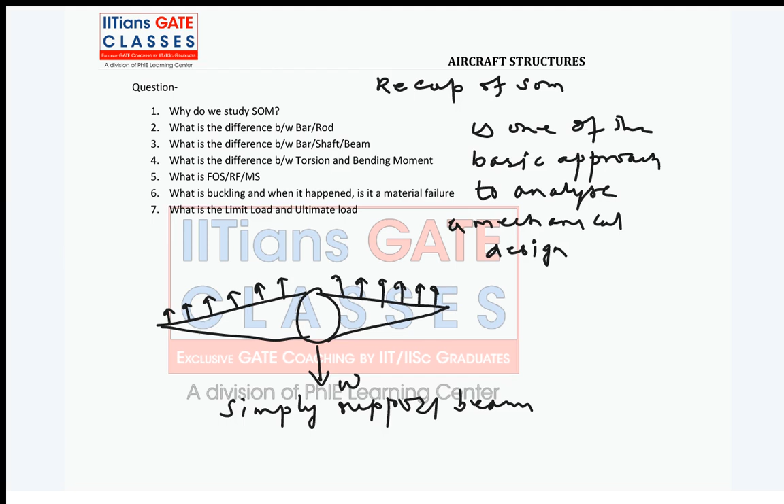If you take the whole aircraft from front view, is it an overhanging beam? It can be idealized as what? Simply supported beam. Clear? So if you take an aircraft with both wings, it can be idealized as a simply supported beam. Your lift is acting as what? Though the lift distribution is not uniform, people consider it as a uniform distribution, and it acts as a support. Okay, what is the load?

Weight. The entire weight of the aircraft acts on the fuselage, because the CG will lie on the symmetric line. Clear? So this idealization is clear. Why is it simply supported? What is the simply supported condition? This is a simply supported beam. Now you reverse it.

You know buoyancy. If you take water, in water there is a boat. So why is the boat floating? Due to buoyancy force, right? Same way, why is the aircraft in air? Force due to water is acting on it, buoyancy force. So buoyancy is a supporting force.

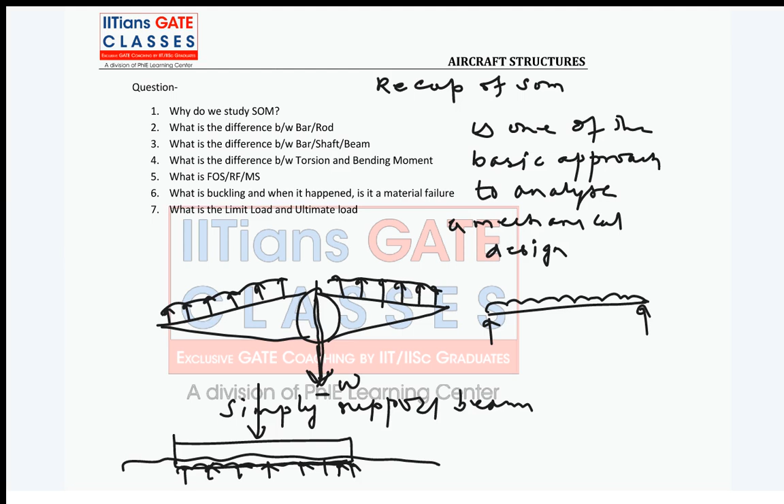If you take the single wing, then how will it be idealized? You can take lift acting upward, and usually the total weight of wing and engine and everything, people can take it as acting at the tip, right? So what is this? It's a cantilever beam.

So all these idealizations we are doing are based on what concepts? On the concepts of strength of material, right? Based on beam theory, and then you have torsion, you have axially loaded structures. So in brief, we can analyze any complicated mechanical system by idealizing it as a simple structure using strength of material basics. So strength of material is very important in any mechanical design to analyze that structure at the preliminary stage, where we use this idealization.

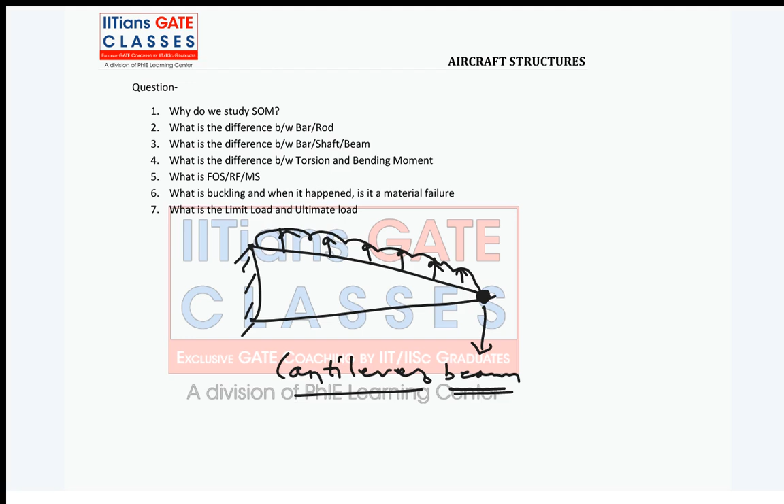Now, what is the parameter people always find? Can anyone tell? In the end, in the paper, what is written for any design? In design, you call it certification. What is finally written for any particular component or structure? Let's take static loads. What do people write? On what basis do people say the structure is safe? No, airworthiness is there, but on what basis do people say the structure is safe under this much load? Yeah, maximum load taken by design, FOS, etc.

Exactly. So, guys, this part is always very important: factor of safety, reserve factor, and MS, margin of safety. So what is the factor of safety? This is a frequently asked question in interviews for structure-related jobs. People are not aware, even if they have read everything. It's not necessarily ultimate load by maximum load. Factor of safety is always allowable by applied.

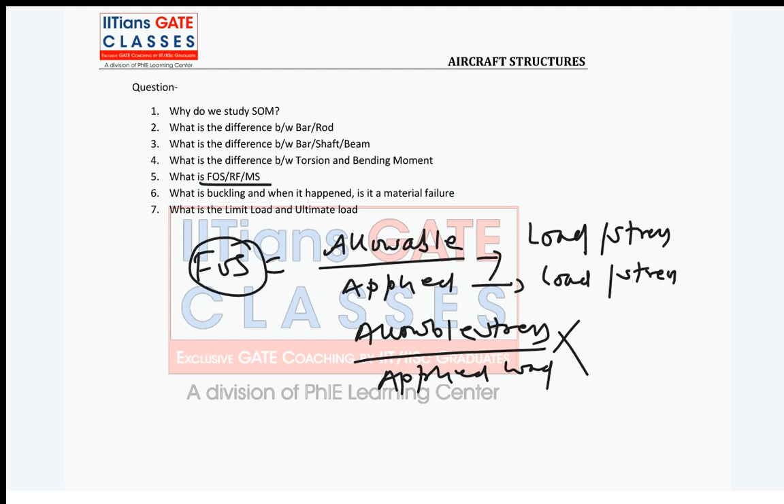In some organizations, this same factor of safety is also known as reserve factor, RF. Now, factor of safety, tell me guys, is it less than 1 or greater than 1? Yeah, it's dimensionless. It should always be greater than 1. For any safe design, the factor of safety must be greater than 1. Same, your RF must be greater than 1.

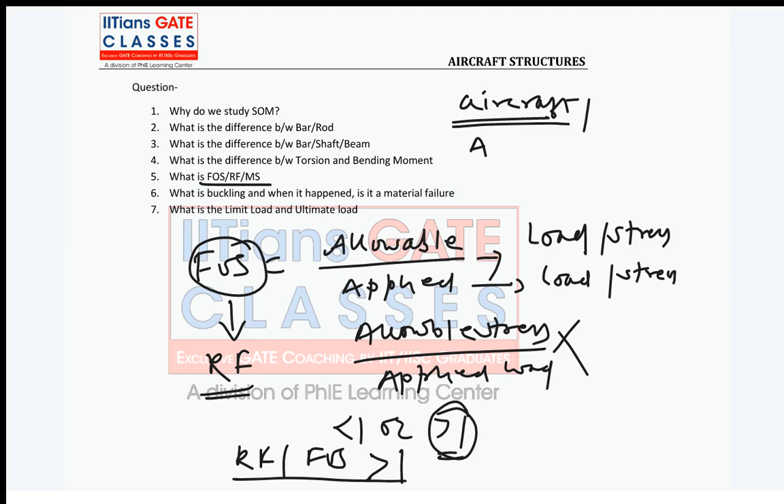Now guys, I'm asking one thing. What is the range of factor of safety for aircraft structures or aerospace structures? What is the factor of safety? Okay, 1.5. Is it 1.5? It's close to 1.2. Factor of safety is close to 1.2. It should not be more.

Why should it not be more? Why is it so close to 1 in the aircraft industry, in aircraft or aerospace structures? Why is the factor of safety so low? Yeah, money is the problem? People have so much money. Do you think money is a problem?

Weight is a problem. You cannot easily fly with high weight. It's not about composites, Pragati. Earlier, all aircraft were aluminum alloy, even metal. You cannot allow more factor of safety in aircraft. It's not just manufacturing cost. It's tough to fly efficiently if there is more weight.

Okay, so earlier the advancement happened slowly, right? So always in aircraft, in aerospace structures, weight is a constraint. You cannot have a high weight structure. So it needs to be a thin-walled structure, and again the factor of safety will be close to 1.

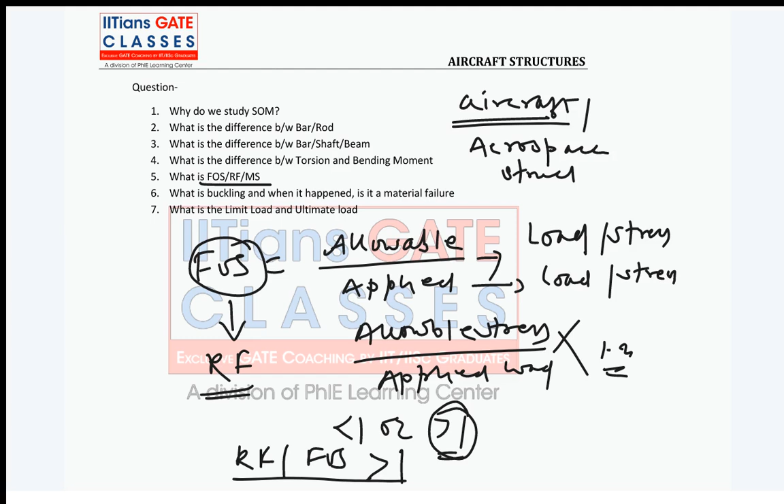So you guys understood what the factor of safety is, everybody? So always in certification we write the factor of safety or reserve factor. Now some companies use MS. What is MS? Can anyone tell? MS or MOS? It's the margin of safety. So the margin of safety formula is always FOS or RF minus 1.

So what does it mean? What should be the margin of safety for any safe design? MS should always be greater than what? 1? Is it 1? MOS should always be greater than 0. So that is the criterion. It should always be greater than 0. It can be 0.2, it can be 0.5, but it cannot be too high either.

If the margin of safety is high, then what do people do? Can anyone tell? If the margin of safety is high in the detailed design phase, what do people do, Sahil? They will try to put less thickness, right? They will try to optimize the structure for weight saving. So we always try to keep a positive margin, but a healthy margin,

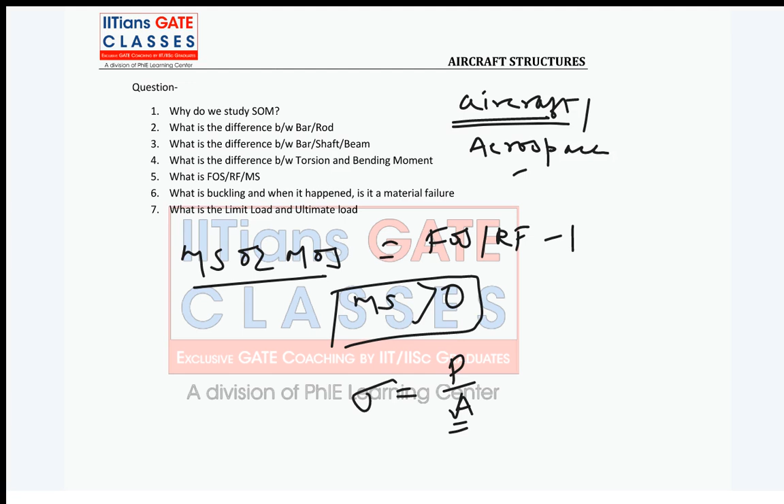Now guys, we were on factor of safety, right? So what is the factor of safety for mechanical designs? In aircraft design we have seen the factor of safety is close to 1.2. What is the factor of safety for mechanical designs? So guys, clear? It can go up to 10.

Nowadays in mechanical design also, in automotive, you guys have seen the Ambassador car and the Maruti car? Anybody from Kolkata? See the difference in design. Assis, you are well aware, right? Hindustan Motors. Now it's a junk company, no more. So you cannot have high weight structures. Now you can see everywhere people use the best materials and as little weight as possible, in any design.

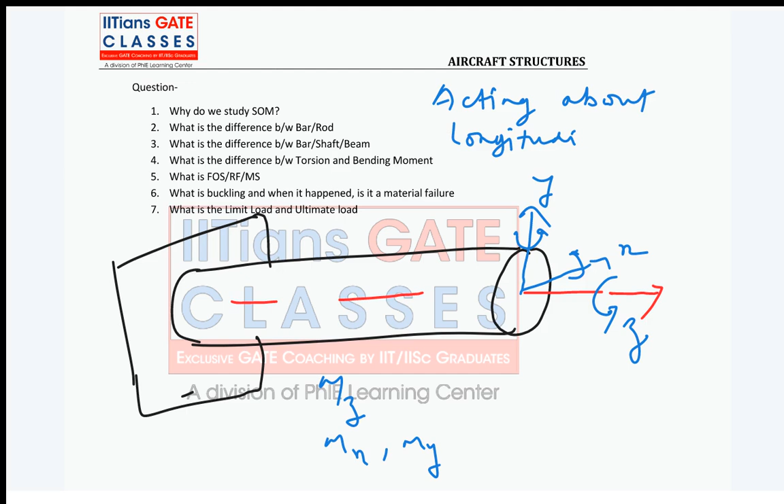So guys, now I am applying three different moments. One moment is about z, one is about x, and one is about y. Now tell me guys, what is this Mz, what is this Mx, and what is this My? So which is torsion? Everybody, which is torsion? Mz is torsion. The moment which is acting about what? Acting about the longitudinal axis. The moment which is acting about longitudinal axis, Mz, is torsion, or torque. Torsional load or torque.

So Mz is torsional load or torque. What about Mx and My? Mx and My are bending moments. So now guys, tell me, the bending moment always acts about which kind of axis? It acts about the cross sectional axis. Clear to everyone now, guys? That's the basic difference between bending moment and torque. Both are moments, or both are couples. I will tell the eccentricity of the load part also. Clear, guys?

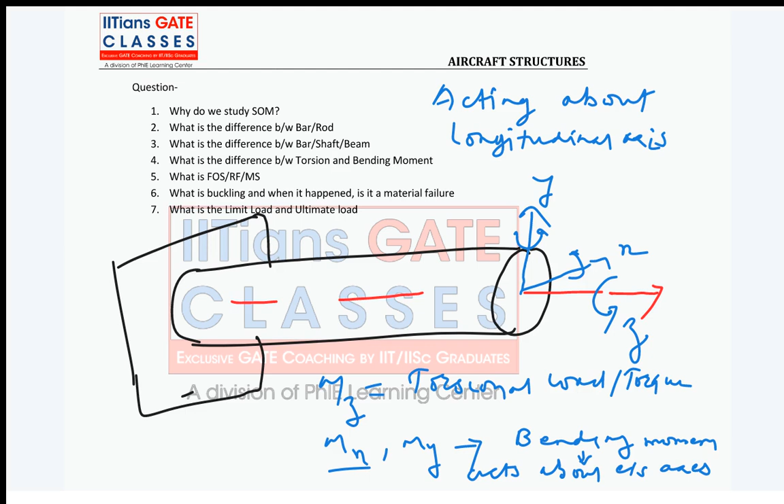Okay. Now, guys, to understand what I mean by eccentricity, let me draw again this part, and then we will go to question series. Now, guys, you look quickly here. If I draw this again,

so guys, are you finding class interesting? Yes or no? Quickly can tell.

Yes, can both occur at same time? Yes, Abhishek. Why not? Both can occur at the same time. I will tell you how. So Abhishek or the others, look here. This is the cross section, and this is the longitudinal axis. Now, guys, suppose there is an axial load which is acting not through this centroid, or you can say origin, O. It is acting at some distance from O, along X direction. What is going to happen? There is an eccentricity of the load. Due to this eccentricity, there will be a moment, and about which axis?

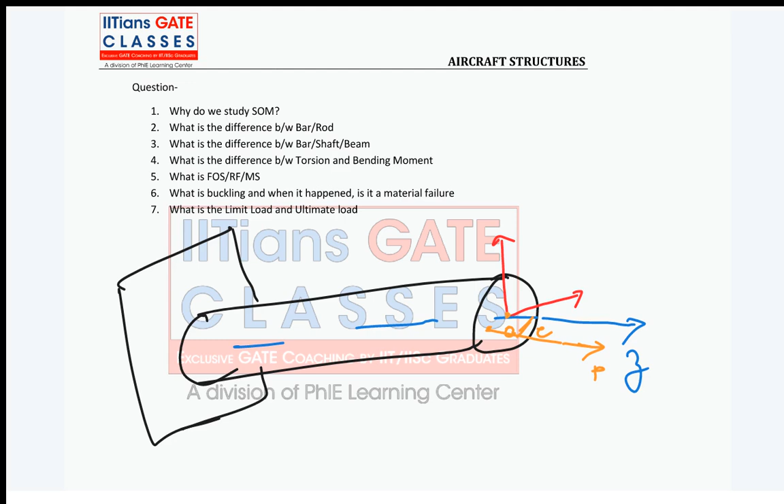If I draw this line, okay, no, wait, guys. This line is like this. Yeah, this is x-axis, and this load is applied at this x-axis. So what is it going to do? Exactly, there will be axial loading and there will be a bending moment. When you bring this load along Z, there will be P load acting along with a moment about Y axis. So what will be My? Your My will be P into this eccentricity. So clear, guys?

Now, Mr. Abhishek, suppose at this same point P, I have another load which is in vertical direction. What is going to happen? Tell me now, Abhishek. This is again eccentricity. This will twist, right? When we resolve this force to the origin, this P will come along with a twist about Z axis. The twist will be this way. Yes, so there is Mz, and that is also P into e. Clear? At the same time you can have both twisting and bending.

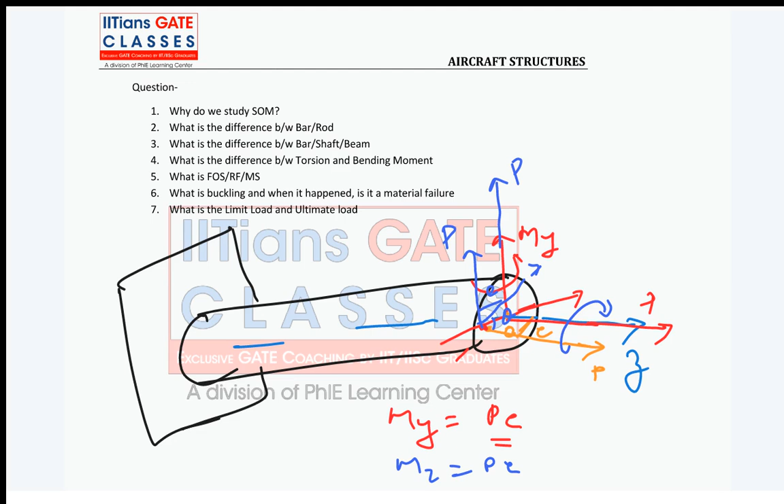Yeah. So guys, till now, is it clear? How to visualize torque, how to visualize bending moment, how these are created due to eccentricity of the loads. Okay, and those things can be at the same time. So that's all about bending moment and torque. Okay, now guys, next thing, tell me, what is buckling? I'm just revising these basics because you all have completed that.

Yeah, angle part. Yeah, Vignesh, sure. So, Vignesh, let's understand with 2D. This can be vertical load, this can be horizontal load, right? Now, suppose my load is acting like this, neither horizontal nor vertical. What is going to happen? There will be a horizontal component and a vertical component. Now these loads are at some eccentricity from O. Both loads will create their respective moments. Clear? This angle part?

Ravi, is it clear? Abhishek, everybody? No, no. Ravi, it is not the same. We'll do that in unsymmetrical loading. You cannot resolve moment just like load. Moment resolution, if moment is acting about an axis, moment is acting in a plane, all those things we will do in unsymmetrical bending, sign convention and all. That's a different story. It's very complicated actually. It's not that simple bending.

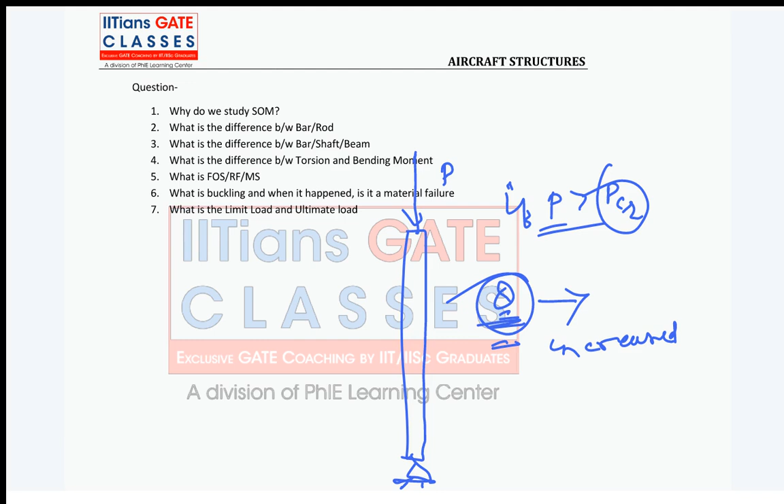In buildings, you see, right? Sometimes buildings collapse under heavy wind. So if your compressive load is greater than P critical, and there is any external disturbance theta, either due to wind or any other thing, what is going to happen? This theta will get increased. Why? You all have learned stability of column. Suppose my column is disturbed by some angle theta.

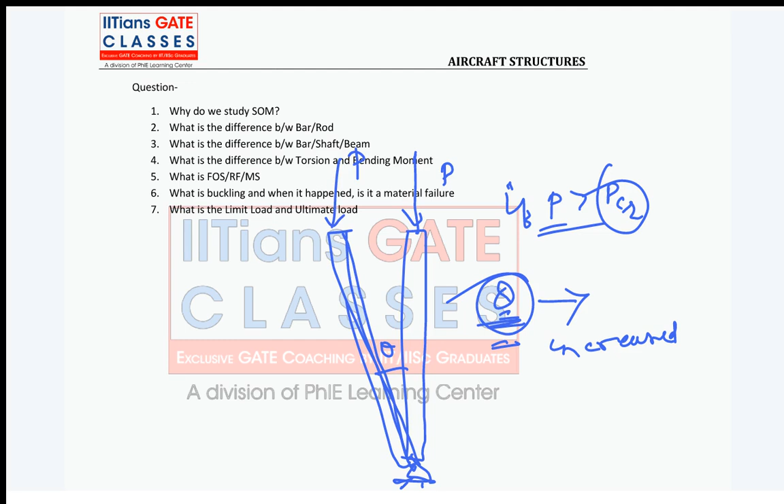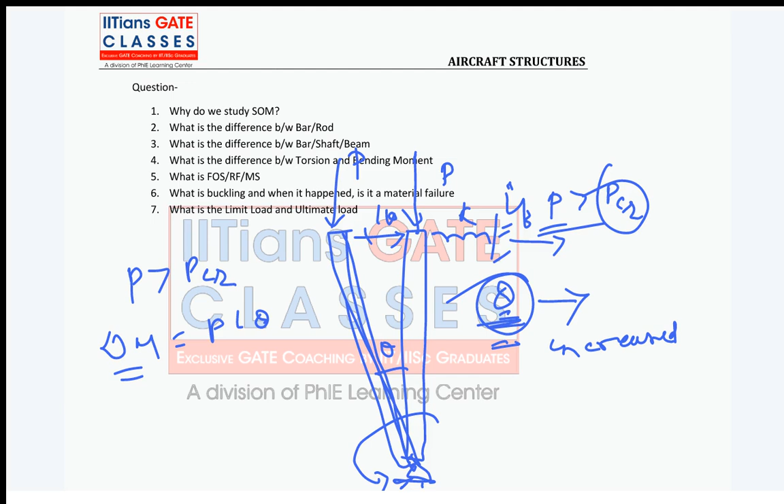It got disturbed by theta. Now if P is greater than P critical, what is going to happen, guys? What will be your distorting moment? My distorting moment will be P into L theta, meaning it will try to rotate in the same direction. What is the restoring moment? Suppose the stiffness of this column is idealized with a spring, and K is my stiffness. The spring force will be K into L theta, so my restoring moment will be KL squared theta.

Now guys, when P is greater than P critical, the column will be unstable for any small disturbance. The disturbance will keep increasing and the column will collapse. That is buckling failure. It will try to regain its original position only if Rm is greater than Dm. And when is Rm greater than Dm? If your KL is greater than P.

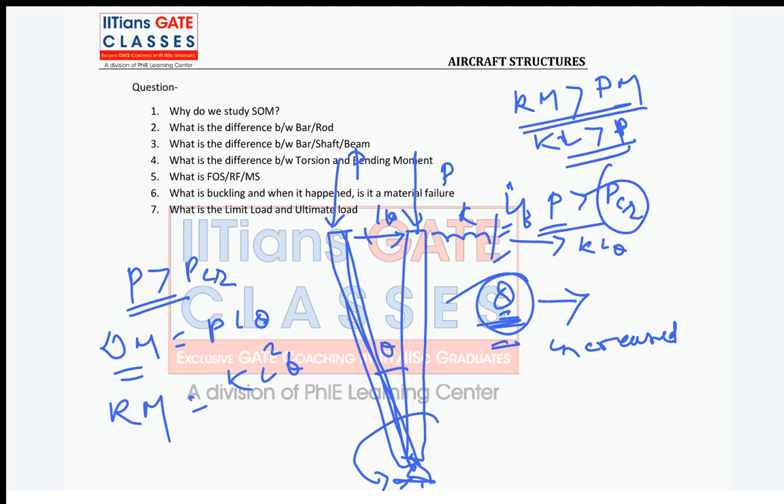So if your load is less than P critical, then only it is a stable equilibrium. Or you guys might have learned this in equilibrium. There is one plot. What is that plot? There is a plot between theta and load, right? This point is what? This point is known as what? P critical, right? It is known as bifurcation point.

So 0 to P critical, this equilibrium is known as what? Can anyone tell? What kind of equilibrium? Stable equilibrium, right? When P equal to P critical, what it is known? Neutral equilibrium. And when P greater than P critical, what it is? Unstable.

I am not teaching this column in depth. But now, guys, are you clear? The buckling failure is not a material failure, neither it is a strength failure, neither it is due to load. It is due to the deflection caused due to load. That is what you call bending. It's not due to material or strength failure, it is due to some external disturbance.

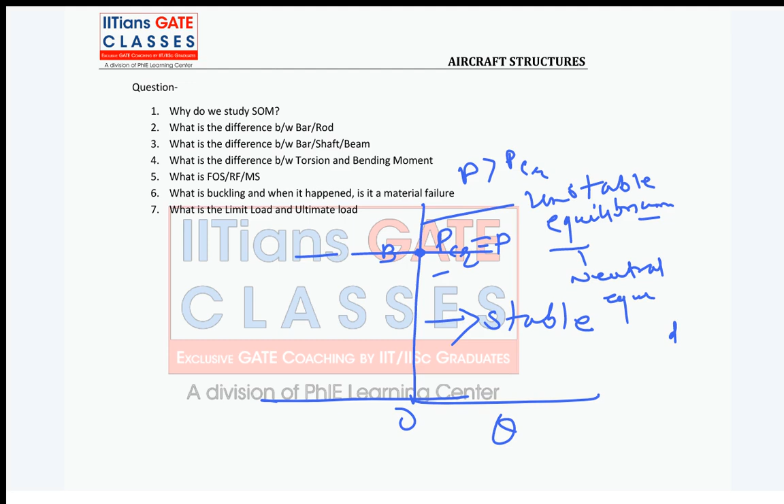Yes. No. Actually, buckling is not depending, but critical buckling load depends on the kind. The simple Euler buckling formula is pi square EI by L square, right? This is the simple buckling formula. Clear? Yes or no? So here it depends. E is there.

This is something known as buckling allowable. What is this critical buckling load known as? Buckling allowable, right? So we use this word buckling allowable. It's not material allowable, it's buckling allowable load. So axial stiffness means what? Again, it depends on materials and cross-sectional property. So stiffness is also a function of material properties.

Just a moment, guys.

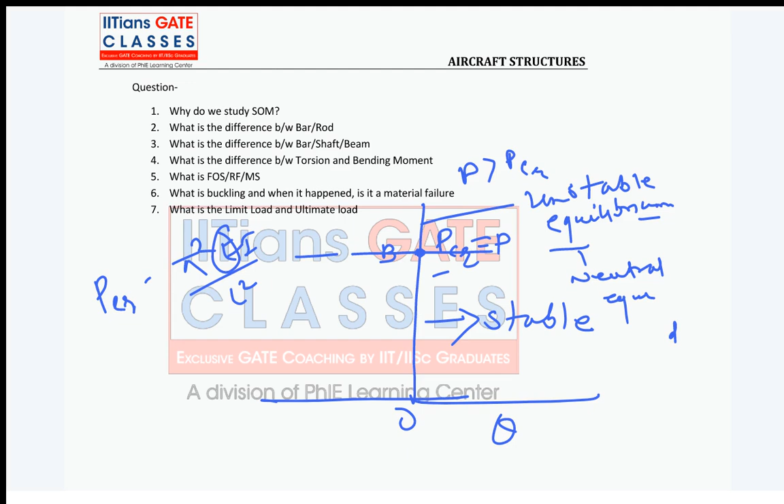Okay, so clear, guys. Now, the last question in this session, recap. Tell me, what is the limit load? What is the ultimate load in aircraft design or in aerostructure design? This is another interview question. What is the limit load? If you go anywhere in an interview,

limit load is a load which any structure is subjected to only once in the lifetime of the structure. Yes, the load up to yield point, but yielding is not allowed, Abhishek. In any aerostructure, yielding is not allowed. You cannot have a plastic strain. So limit load is a load which can be acted only once in the service life of the structure.

What is the ultimate load? No, it is not factor of safety. Ultimate load in the aircraft industry is always 1.5 times the limit load. Why does the ultimate load concept come into the picture? To avoid catastrophic failure due to gust or emergency. If you are driving a car and something happens, you can stop. But if something happens in an aircraft, you want it to crash? No, right? So aircraft are also designed for ultimate load.

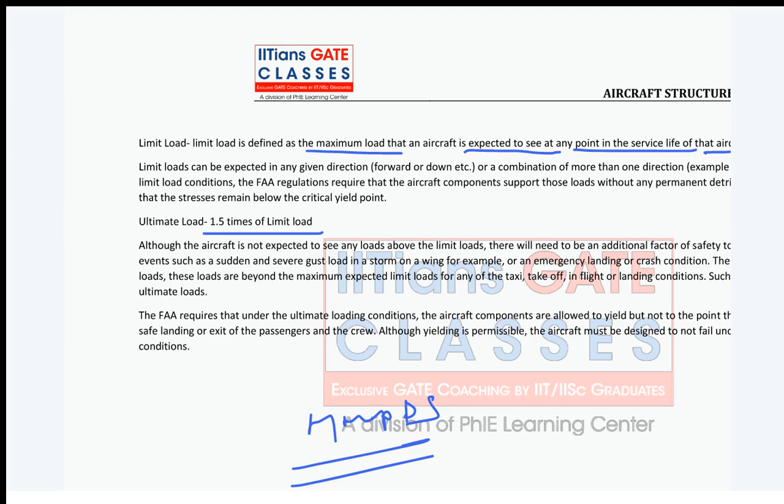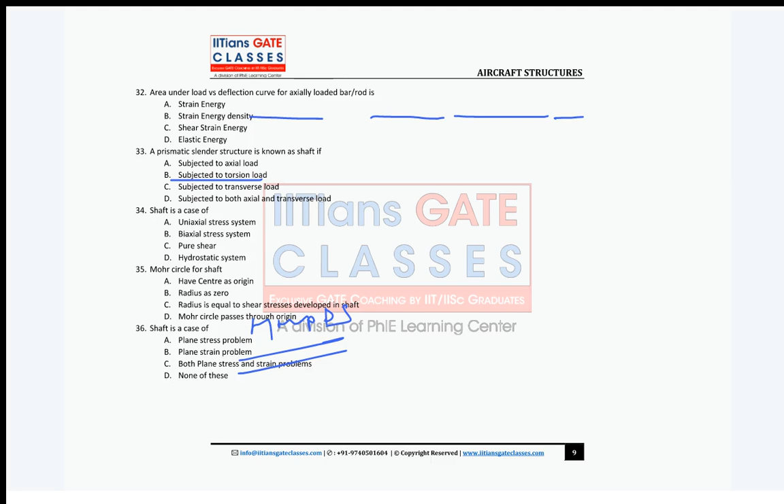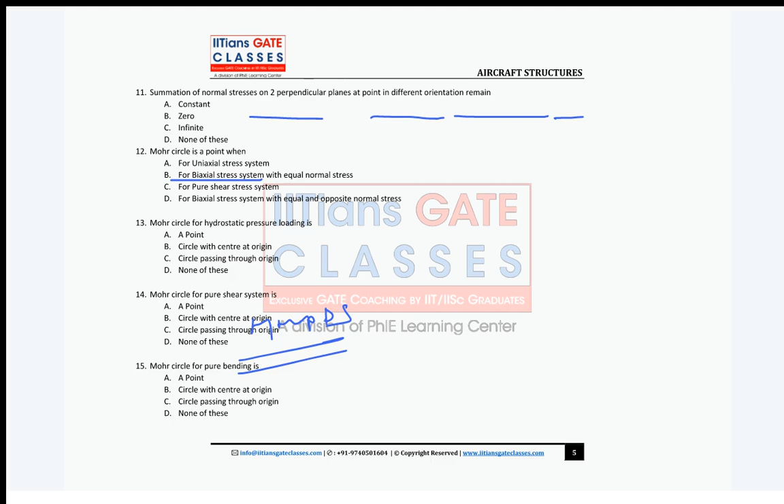Now there was one more thing. There are around 50 questions. So guys, should I do this basic question? I thought to recap. So you guys can do, right? This almost recaps your whole SOM part, mainly your theoretical part. There are 51 questions I have listed. Okay, so let's do a few questions. I will share with you guys. Okay, I want to check. So stress and strain are what kind of quantities?

Yeah, bird strike is bird ingestion. Yes, Sivendra. Bird ingestion is a bird strike. And there is testing also done for bird ingestion. You know what they do in a test bed? They will put a mass, they will throw the mass. Testing is done on the test bed for bird ingestion. That is a very normal problem, right? Many times when aircraft fly, bird ingestion happens. Yeah, chicken. On YouTube you can see those videos also. FBO is also there, fan blade out events.

So when you come into the aircraft industry, either in aero engine or airframe structure, mainly in aero engine, a lot of analysis is done for different ultimate conditions. Same way for ultimate loads, G loads. One more question I didn't ask. In any structure, in a broader way, what two different kinds of loads act? Can you define the loads on a body in a broader picture?

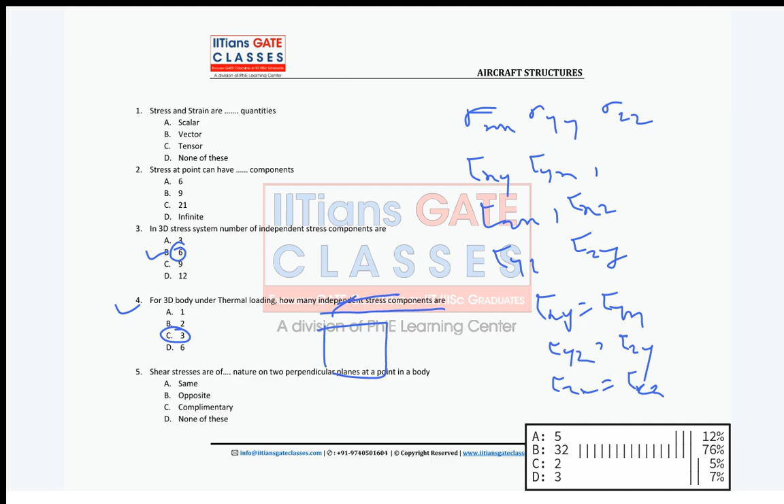Usually, there will be three stress components if it is restrained in all three directions. Now, tell me what those three stress components are: normal or shear? Thermal loading will not create any shear. It will only change the volume, so it will have only normal stress components. Now question number 5: shear stresses are of what kind of nature? Same, opposite? Shear stresses are of complementary nature on two perpendicular planes at a point in a body. Okay, complementary nature. So we have done these first five questions.